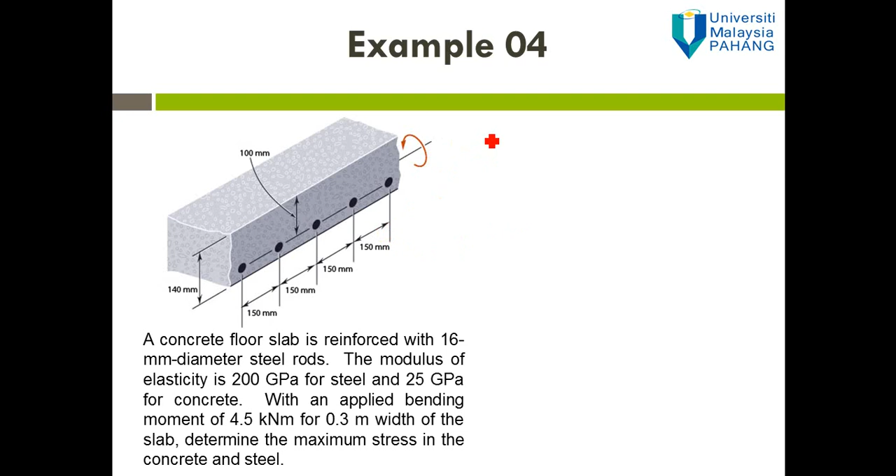Alright, so based on the question, what we have to do is determine the maximum stress in concrete and also the maximum stress in steel. Given the diameter of steel rod is equal to 16 mm. And then what else?

The question also gives us the E for steel, which is equal to 200 GPa, and E for concrete is 25 GPa. And then the bending moment is applied on the concrete beam for the width of 0.3 meter. So we will analyze the beam for 0.3 meter only, from here to here.

Alright, so let me draw the reinforced concrete beam first. So that is the concrete beam, and then we have the steel rod, and the distance here is 0.15 meter, and also from here to here is 0.15 meter. So basically there are two steel rods involved.

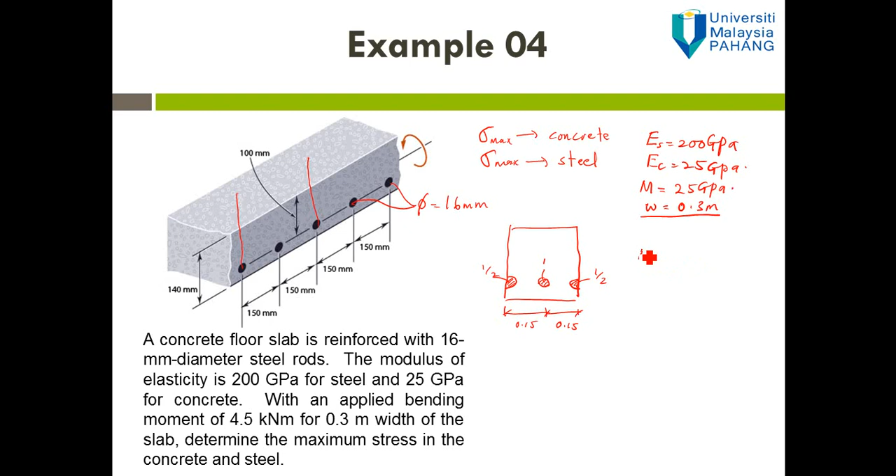Now let's start with calculating the transformation factor n, which is n equal to E steel over E concrete, which means that we will transform steel into concrete. So n is equal to 200 over 25, and using a calculator we get 8.

Sigma max is given by sigma max equal to Mc over I, but for steel sigma max is equal to Mc over I multiplied by n, because we transform steel into concrete. So from the flexural equation, what we have to calculate is I. We need the value of I in order to calculate the stress.

In order to calculate I, we have to know where the location of the neutral axis is. After that, we can calculate the value of I, the moment of inertia.

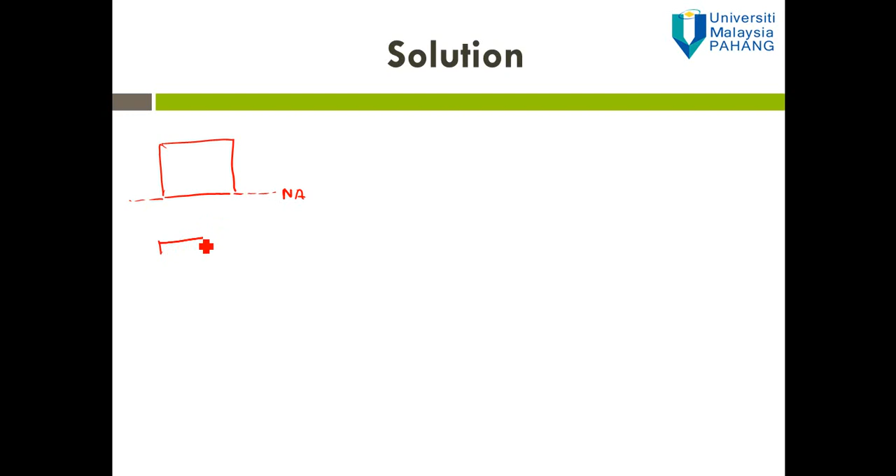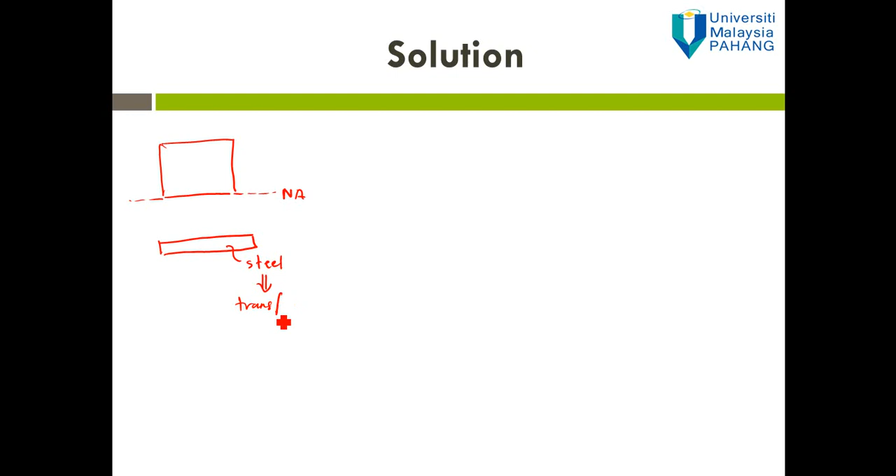But the concrete below the neutral axis we will remove from the analysis. So we assume the beam cannot support the tensile load. Now, that is the material for the steel, transformed to concrete.

Because we transform into concrete, instead of the area we have to multiply by n. So the area for the steel that has been transformed into concrete is given by nAs. You can see how to do the transformation from the previous video.

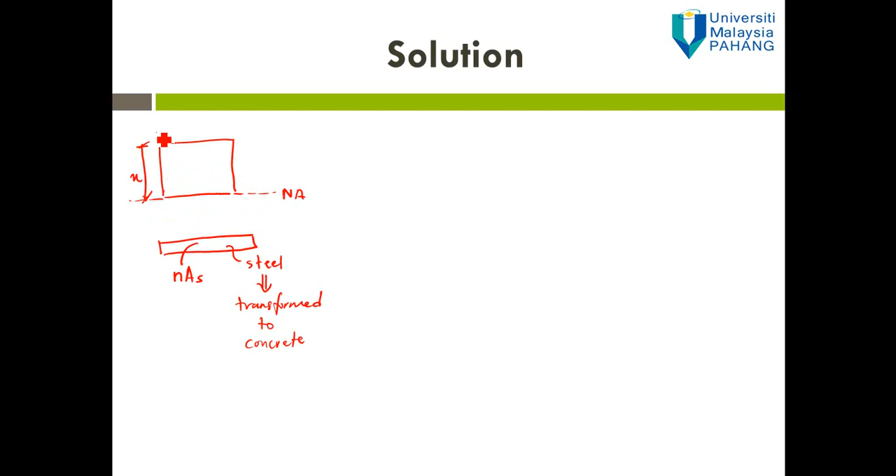So now we assume here is x. The distance here is x because we don't know exactly where the location of the neutral axis is. If we measure from the top to the neutral axis, we assume the distance is x. And here is 0.3, the width of the concrete beam. And of course the centroid for the overall concrete will be at the line of the neutral axis.

Based on the question, the distance from the top surface to the steel rod is equal to 0.1 meter, so the distance from the neutral axis to the steel rod is equal to 0.1 minus x. So from this illustration we can calculate x so that we know the location of the neutral axis.

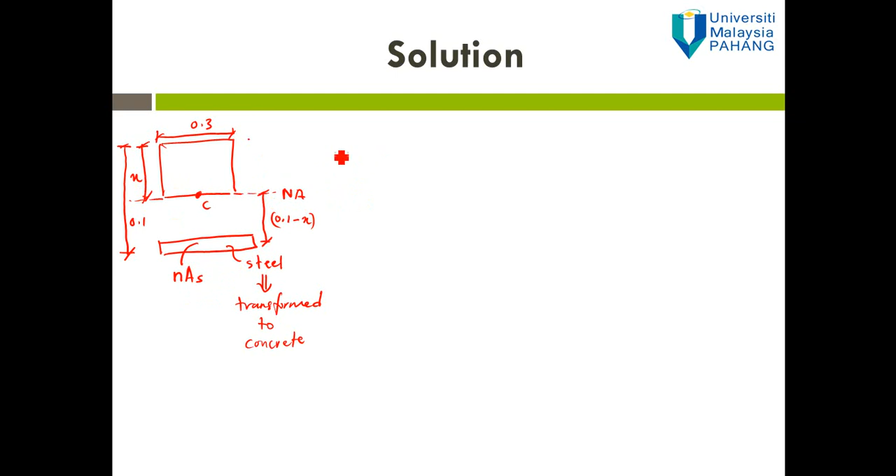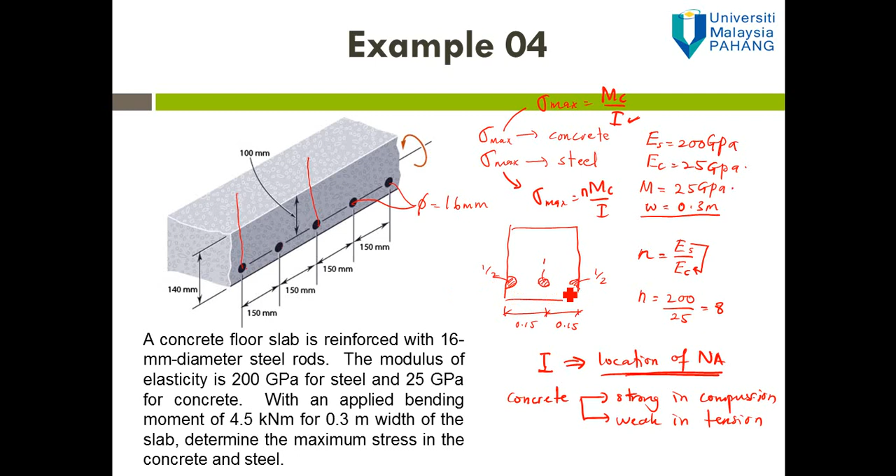First, before we calculate the value of x, let's determine nAs. The area for the steel is given by pi over 4 times d steel squared, multiplied by 2, because we have 2 rods. For the distance 0.3 meter, going back to the previous slide, we have half of a rod, one full rod, and half of a rod, so the total is 2 rods. That's why we multiply by 2.

So here is equal to pi over 4 times the diameter 0.016 squared, multiplied by 2. So we have 4.021 times 10 to the minus 4 meters squared. Therefore, nAs is equal to 4.021 times 10 to the minus 4 times 8, equal to 3.217 times 10 to the minus 3 meters squared.

So now we can apply this in order to calculate x. We determine x by using the summation of yA equal to 0. Where does this equation come from? Please refer to the previous video.

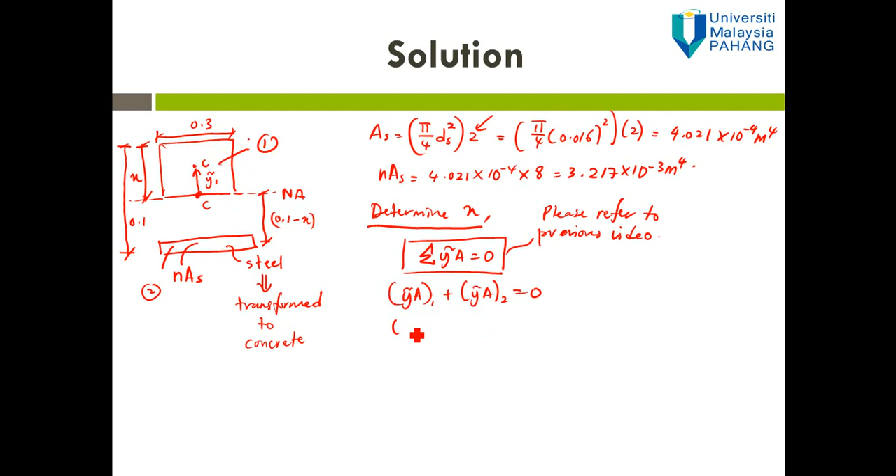Now let's expand this equation: yA for part 1 plus yA for part 2 is equal to 0, or shape 1 and shape 2. This is shape 1, this is shape 2. y for shape 1 is measured from the centroid of part 1 to the neutral axis, so that will be y1. For this case, y1 is equal to x over 2, and the area for part 1 is equal to 0.3 times x.

Then plus y2. y2 is measured from the centroid of part 2 to the neutral axis. Because y1 and y2 are in opposite directions, we have a minus here. So y2 is equal to 0.1 minus x, and the area for part 2 is equal to nAs, which is 3.217 times 10 to the minus 3. This equals 0.

If we expand this equation, we have 0.15x squared plus 3.217 times 10 to the minus 3 x minus 3.217 times 10 to the minus 4 equal to 0. Using a calculator, we get x equal to 0.0368 meter, or 36.8 millimeters.

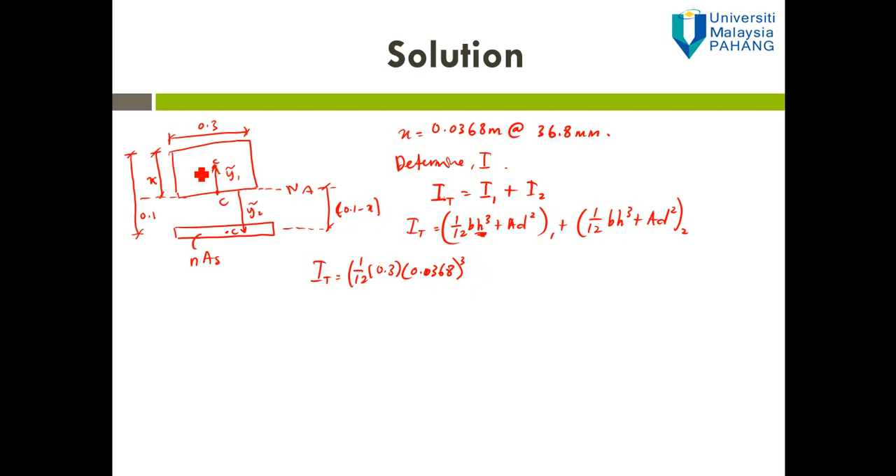So b for part 1 is 0.3, and h for part 1 is equal to x, which is equal to 0.0368, to the power of 3. So for this case h is equal to x for part 1. And then plus the area, 0.3 times 0.0368, and then d². For this case d is equal to y1, from the centroid to the centroid, which is x over 2, so 0.0368 over 2, squared.

And then plus the moment of inertia for part 2, which is 1/12 bh³. So this is part 1, shape 1, and this is part 2, shape 2. For shape 2, you can see here the h is small, which is approximately equal to the diameter of the steel rod.

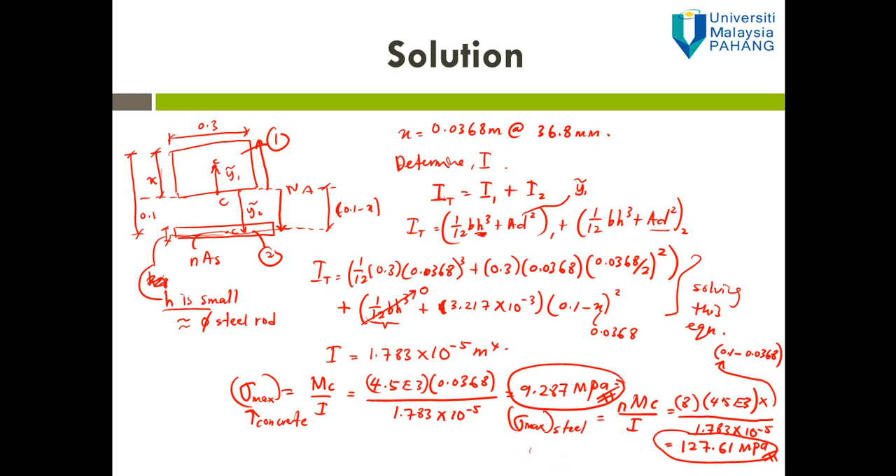Alright, so that is the maximum value for stress in concrete, and that is the maximum value for the stress in steel. Okay, now let's proceed with example 5.

Knowing that the bending moment M is equal to 250 N·m, determine the maximum stress, sigma max, in the beam shown when the radius of fillet r is equal to 4 mm. So that is the r. This is a case that involves stress concentration. We have a fillet here, and this fillet induces the stress concentration somewhere here.

So sigma max is given by K, the stress concentration factor, multiplied by Mc over I. From this equation, we need the value of K, and we have to calculate K and I in order to calculate sigma max. To calculate K, we need the radius of the fillet over the small diameter here, small d.

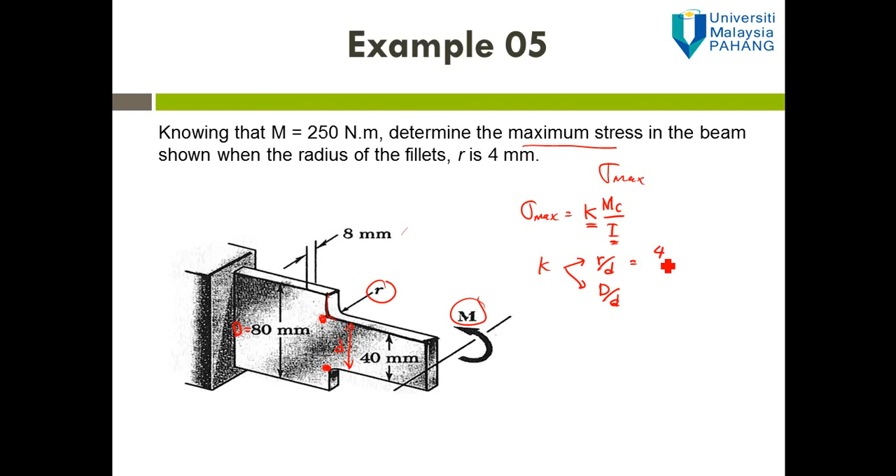And we also need capital D over d, which is capital D here divided by small d. For our case, r over d is equal to 4 over 40, which is equal to 0.1, and capital D over d is equal to 80 over 40, which is equal to 2. Using these values, we can find K. But before that, let's calculate the value of I.

The I is given by 1/12 bh cubed. How do I get this equation? This is the equation of I for a rectangular cross section beam. We consider this cross section of the beam; that will be b, and here will be h.

So I is equal to 1/12 times b, equal to 0.008, times h, equal to 0.04, to the power of 3. From here, I is equal to 4.267 times 10 to the minus 8 m to the power of 4. Now let's proceed to calculate the value of K.

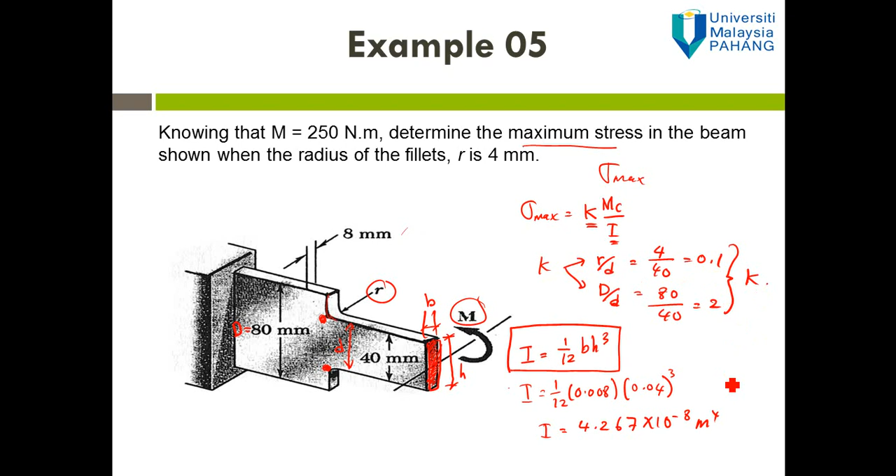We have r over d equal to 0.1 and capital D over d equal to 2. From this figure, r over d on the x-axis equals 0.1, so that is this line. And this is the line for capital D over d equal to 2.

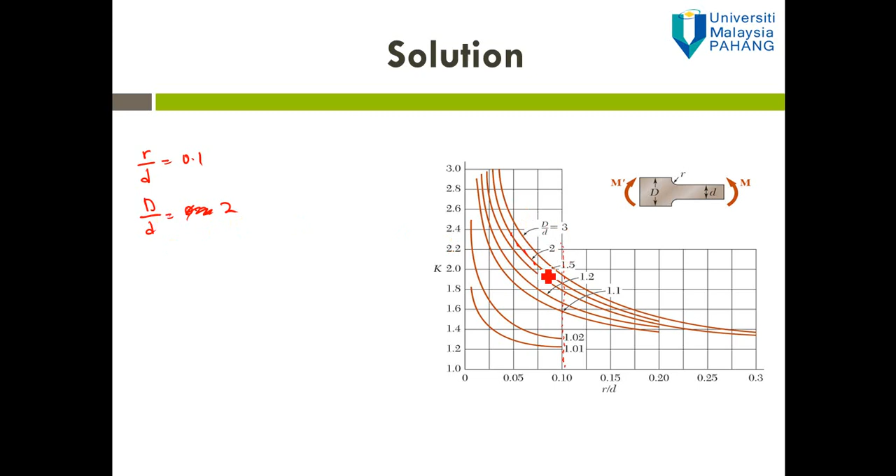See here. We take the intercept point, and then we can get the value of K. From here, K is approximately equal to 1.9. I can say 1.8 something. Let's choose 1.9.

Now we can calculate sigma max in the beam, which is equal to K Mc over I, with K equal to 1.9 and M equal to 250. And then c: this is the beam, here will be sigma max, the neutral axis is somewhere here, so that's c. Because the distance here is 0.04, c is equal to

0.04 divided by 2, and then divided by I, the moment of inertia, which is equal to 4.267 times 10 to the minus 8. So sigma max is equal to 222.64 MPa. This is the value of sigma max based on our K equal to 1.9.